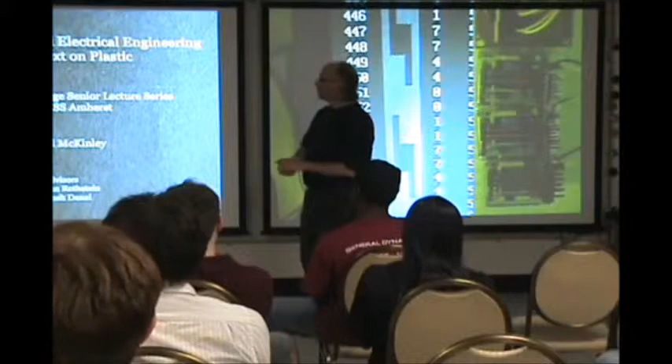Thank you. Welcome. So I'm Michael McKinley. I'm a graduating senior ComColl student in the Mechanical Engineering Department. And I think after last week, the example set forth to bring your own posse was a good choice. So I tried to do that myself, but unfortunately I don't think most of them got past the EE bouncers at the door.

So anyway, today I'll be talking about how we use some interesting properties of polymers to create text on extruded plastic. So as is shown by the title here, let's see. Oh, come on. Got some issues with the mouse going on here.

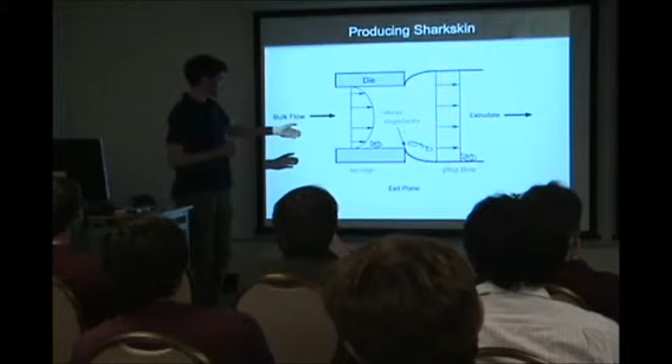All right. So the basis of my project is the production of shark skin. Shark skin is a micro ridge-like structure produced on an extruded surface. And this comes about as a result of an instability that occurs at the exit plane of a die. So you can see here in this diagram, we've got a bulk flow of plastic in this region. It's being extruded through a die face, and due to a temperature gradient, the die exit plane being a lower temperature than the bulk flow, we get a stress singularity.

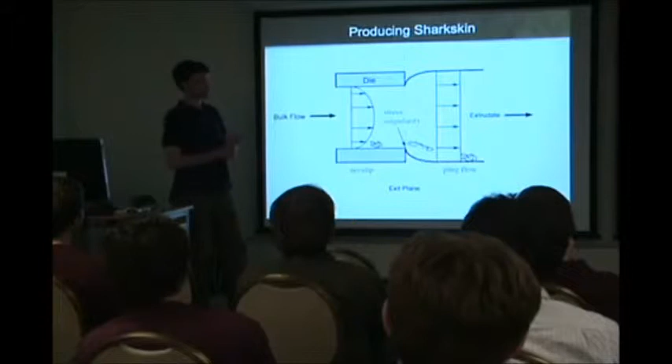And so this happens as a result of a no-slip boundary and the bulk extrudate rapidly accelerating to the plug flow of our polymer. So as a result, if this temperature gradient is too high, we get some pretty severe ridge-like structures, as shown in this image here. And these can be up to about 100 micrometers in scale. In industry, this is a big problem. You don't want your extruded plastic to have a surface texture like this. But we're actually using this to our advantage to produce some interesting textures.

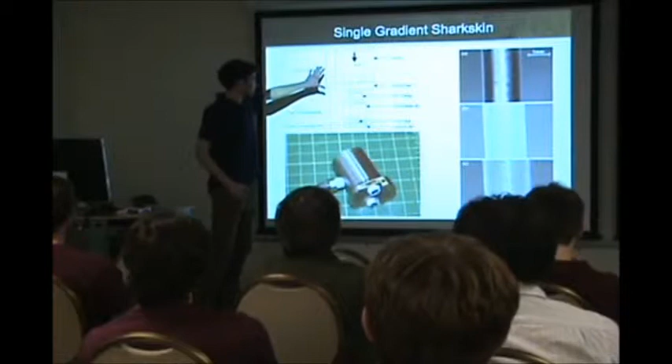So a little bit of background. This project came about 5 years ago, I believe, by a student named Eric Miller, who was getting his master's degree over in mechanical engineering. He was working on a single gradient shark skin project. And so basically what we have here is a schematic of his die. So we're able to produce a temperature gradient between the main heating zone of our extruder and that output plane of our die. And in doing so, we can create a single extrudate difference in shark skin in one dimension.

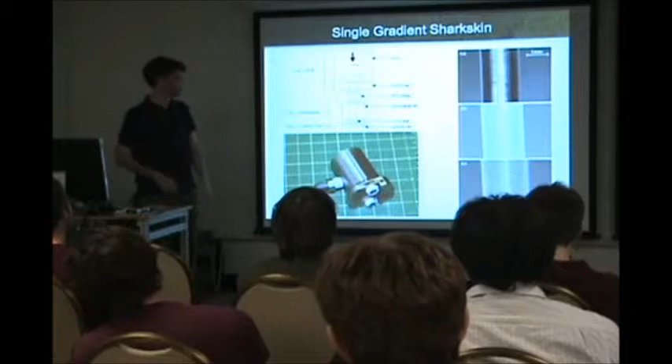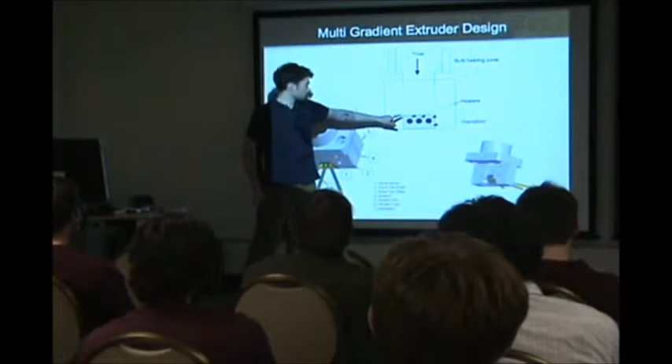So we got some images here of my design. It interfaces with the same extruder barrel as before, so I don't have to deal with that problem. But we're looking at a die with three heater pins, and each heater pin is a temperature-controlled loop. And we'll talk more about that later. But you can see here these are brass heater pins separated by an insulator layer, in a main heater block, which we can maintain at a temperature.

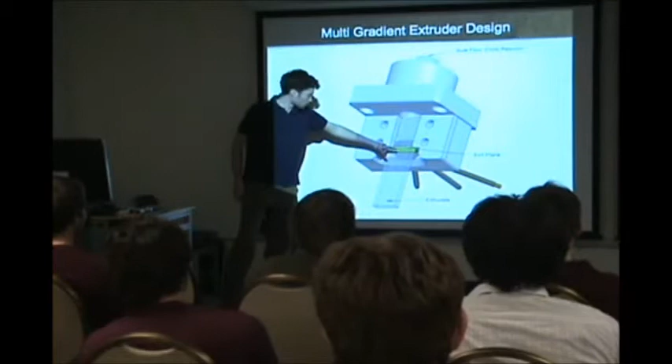So if you look at this drawing here, we can see as this extrudate is coming out, the last surface in contact is this temperature-controlled pin. And so right in these regions, we can control that surface texture and hopefully create some interesting designs, well in this case letters is our proof of concept.

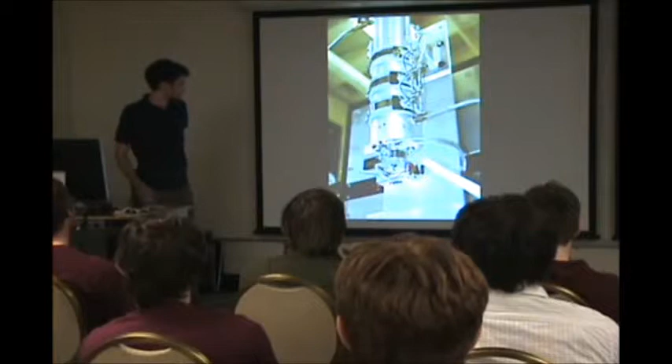It's run-of-the-mill plastic. And then here's another image of our extruder. So you can see if we get that cutaway, our extruding surface is no longer in contact with our die as we're exiting our die head.

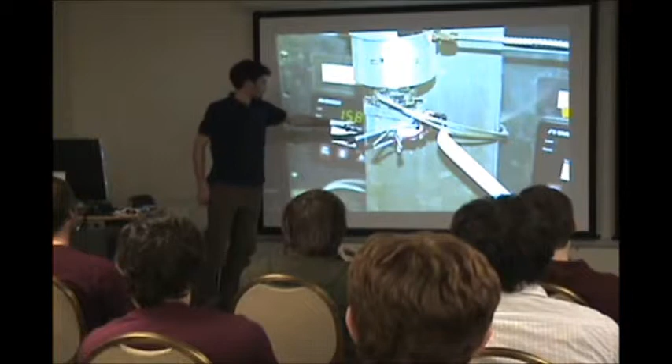And a final image here, we can see our heater pins and all the controls, the feedback part necessary to control our temperature. So we've got 30 gauge nichrome wire wrapped around our heater pins, and buried inside that head, we have some really small temperature sensors. In this case, these are RTDs. I'm actually using LM35s, which are a temperature IC. So they're approximately the same scale.

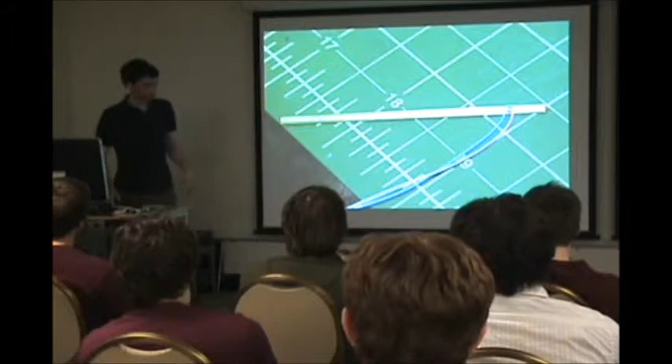So I guess the LM35s are actually really nice because they interface with the Arduino without an issue at all. And that'll be part of my project later here. So you can see those pins are assembled and then epoxied in place. And our epoxy is our insulation barrier between each heater pin, each heater element.

And one of the problems with the design is that you've got to actually machine these things in a specific order. So if you have a problem down the line, you've got to start over due to the limitations of our machining. So this design was pretty much pushing the limits of what we could do with the tools and techniques that we have available.

So, obviously we're dealing with high pressures here, so safety's got to be our top concern, or at least top 3. Yeah, so I don't really think any of that would do me any good if it did let loose, but it felt better, and so we did. And the Non-Newtonian Fluid Dynamics Lab actually looks at Kevlar as one of their projects. So they happen to have a Kevlar vest and helmet sitting around. It's like, well, I might as well put it to use. If something happened and I wasn't wearing that, that'd be a problem.

So anyway, it works. And that's the cool part. You can see here we get a pretty large difference in texture between our large surface ridges around the 100 micrometer scale here and our smooth surface here. And this is a coloration behind, so you can actually see the difference a little better. And that's just kind of a gross start point with my design to see how well it was functioning.

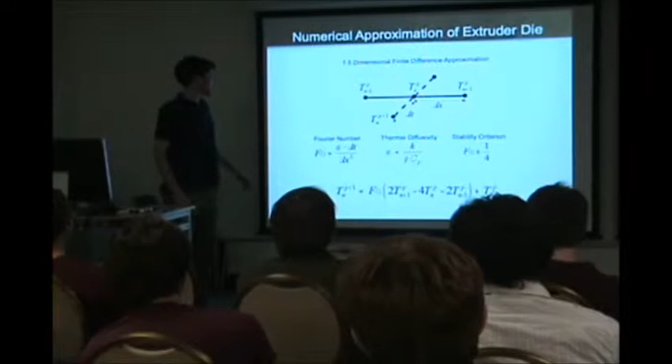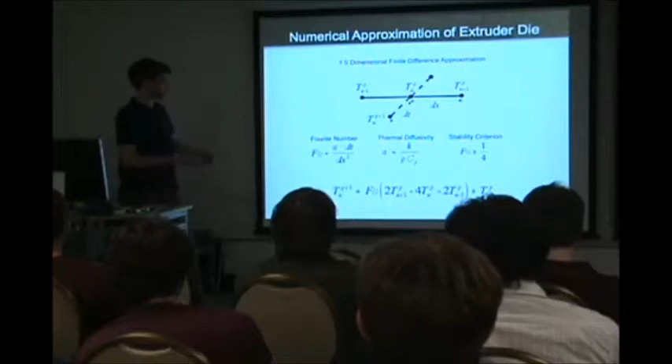So the important thing to note here is we've got our Fourier number, which is really the important part, and that's comprised of our thermal diffusivity of our insulation material. And obviously we got to keep the stability criterion right, so we reach a convergence at the end. And so that can actually get some decent results here. So this is just to kind of show you graphically what we're looking at.

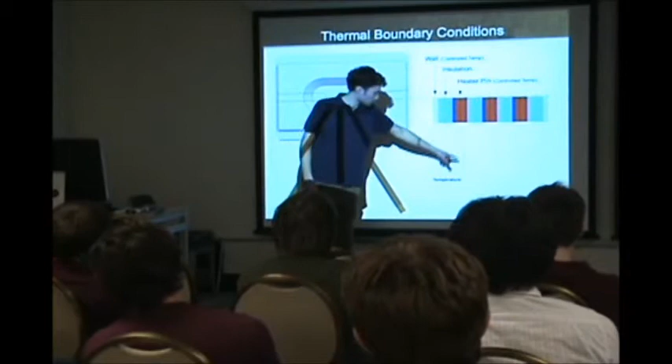We're modeling this interface right here with the heater pins as a one-dimensional heat transfer between a temperature-controlled pin, a temperature-controlled wall, and this insulated boundary layer. And so here's what our temperature would look like. So we've got actual data that I can take from my temperature sensors. That's from the heater pin. We've got a known constant temperature at the wall, and then a second order response from the insulation material.

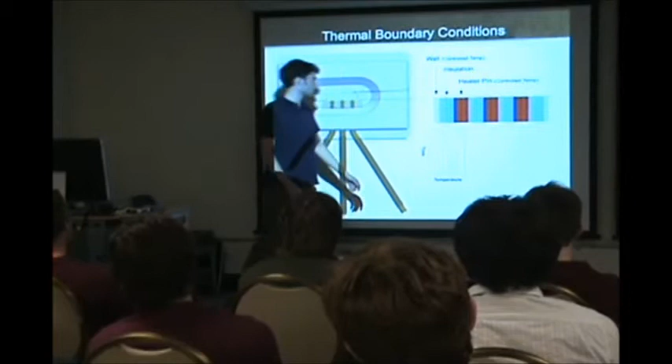Well, it varies from first to second as you go through it. But anyway, let's see here. Get a better picture of what's happening. So to create an M, we start with Albrecht Dürer's nice Roman uppercase M, and then we got my representation, which is 3 pixels of spaciness. And so we're looking at our M, and then we got some signals here that we're translating into heater changes in temperature, and my thermal approximation of what's happening in the surfaces around it.

So the important thing to note here is that this is open loop control, and we're able to do it pretty well because there aren't any consecutive points in this M. So if you look at it in this plane here, we never reach steady state. We're always looking at the transients, and so we can actually push the limits of the system quite a bit and not run into problems down the line. So yeah, here's another look at it.

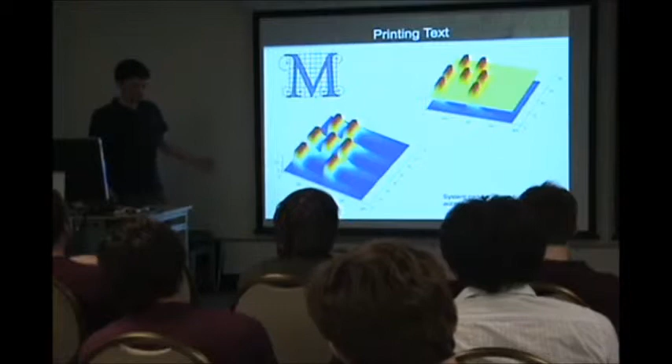So the idea is if we exceed a threshold value, we're no longer producing shark skin. So we'll give it an arbitrary value of 0.5 here. Anything above that, we're getting a nice clear letter. Anything below it, we're getting shark skin, and that's what we want. And so there isn't really any bleed between letters in our simulated piece. So yeah, here's a look at our open loop control.

We've got a program I've written in C that's interfacing with the relay board, and we've got our 24-watt heater coils at each pin, as shown before. So on the screen on the right side here, I can actually demonstrate what's going on. Let's try to get this going here. So I got DOS running. We're high class going over here.

Okay, so you see it's printed out UMass in SpaceFont, and it's been printed out a few times here. And so we got our relays clicking away over there, nice and happy, making space music, and I got some LEDs, and everything would link up to our extruder, and we get open loop M's, which look like that, and you can see it look kind of like the M in the simulation over there. So if you can't see it, there's the M. You can see Albrecht Dürer's M right there, nice and clean Roman serifs and everything.

And yeah, so that works pretty well for the letters that never have to reach steady state. But if we're talking about something like an H, then we got some problems going open loop. So this section in here, if we're pushing it real hard to get those transients, we're going to exceed the limitations of our insulation material, and we're going to get a bleed over. So you can see the bleed over in the H over there on the right-hand side.

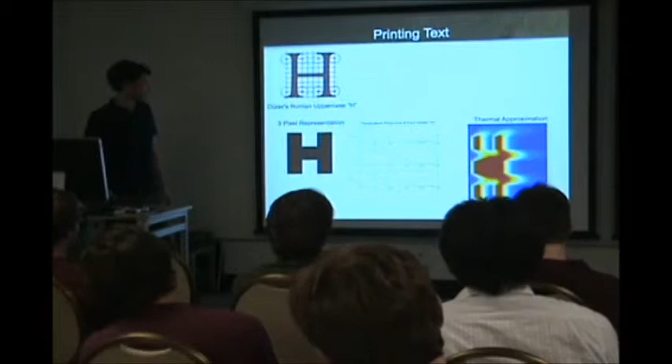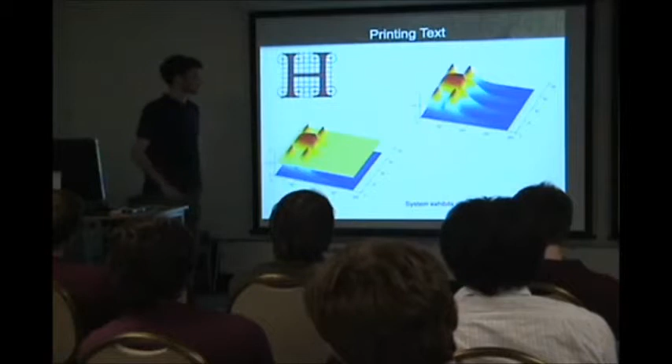And that becomes more of a problem down the line once we get a whole series of letters. So if we had a bunch of H's in a row, then the consecutive letters would be more and more out of control because we don't have any feedback. So we got this nice Arduino system here. So here's a closed loop control algorithm. Basically, it's the same block diagram as before with our open loop boards, because I made everything modular.

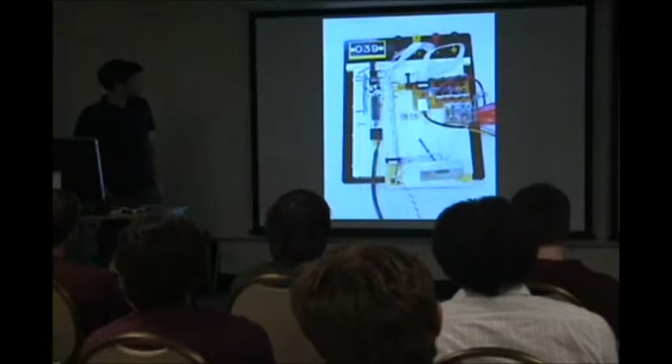But we're looking at 3-channel PI control through the Arduino, which is kind of fun because the Arduino works really well for this. I'm only running at 40 hertz with the Arduino because we're kicking back serial data every 0.025 seconds, so I get an idea of what's really going on. And I was going to bring it in to show you, but it's kind of stuck to my extruder at the moment. So yeah, here's a picture of my board, and there's a cutaway of the heater pins that we're working with.

So this is kind of my thermal test apparatus. So I can do some controller tuning without being actually next to the extruder and taking up lab space. So I've been driving Jim nuts with the pulse width modulation on the relays all day long.

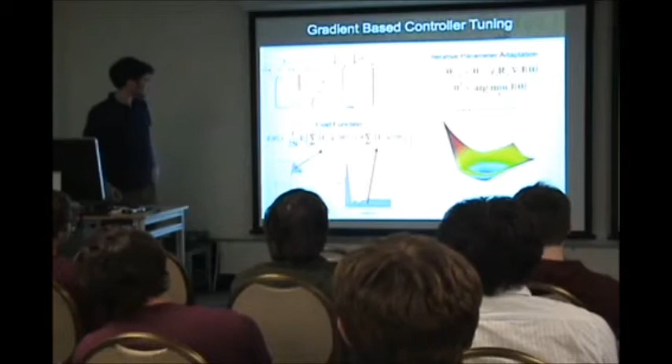So in one slide, I'm going to tell you how we do iterative feedback tuning, which is gradient-based controller tuning. And kind of the basis of it is we've got our control loop. I don't know if any of you or all of you have taken controls, but here's our control loop, right? And our G is our plant, which is the thermal response of our heater profile. And our CR and CY are, in this case, PI controllers. Now our CR has moved beyond our summation block because we're trying to get rid of a derivative kick.

And then we're applying a tuning algorithm. In this case, the point of the tuning algorithm is to find the lowest cost of a cost function. You can see a green line here, which represents the response of, I believe this is a fourth order system. The green line is what we want, the blue line is the actual response, and the cost would be the integral of that area between the two. And you could play games with both the system response and the control effort to get a best cost overall, depending on what you want to do.

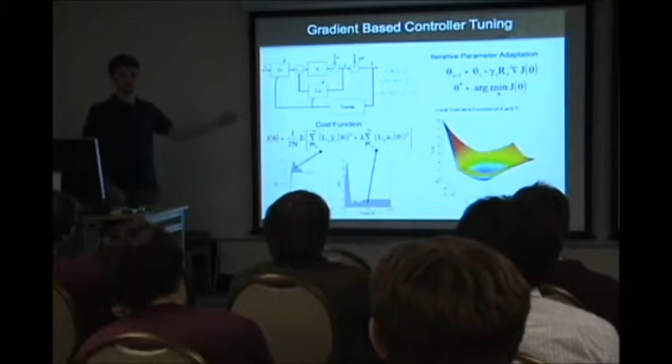So we can apply that. I mean, we can also apply Ziegler-Nichols and basic tuning laws, but this is much more fun, really. I mean, come on, we got Simulink running. I already did system identification, so we do fun stuff.

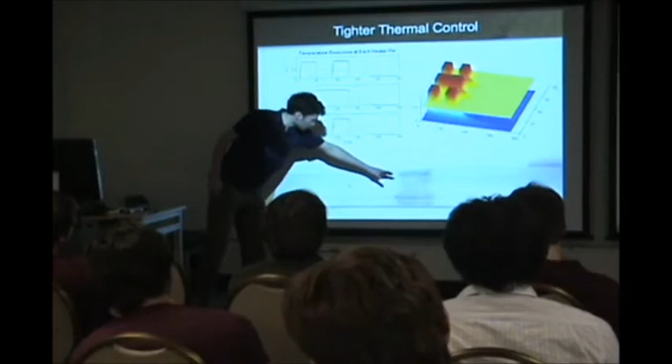But here's our H with thermal control, and there isn't an H there, but you can see we're not getting any bleed over between the pins here. So everything is segregated to one side of that extrudate. And the point of this graph here is to show you that we're not exceeding tolerance values that we set on the plastic. So we don't want to burn it, for example. We can control exactly what we want and get a really, really fast response time on those H heater pins.

So all in all, it's a pretty good system. It works reasonably well to print text. And the point of the project was proven in that we can accurately control the surface features of this extrudate. Now you ask, what's the point of controlling the surface features of plastic extrudate? Well, in our lab, Professor Rothstein's primary research at the moment deals with drag reduction in microstructures on surfaces.

And currently, the method they use to do that is a photolithography-based method, and it takes weeks, and it's a pain in the neck. So ideally, you could use something like this and tune it just right using my controlled feedback method here, and produce surface features of exactly the right amplitude and, not wavelength, but period that you want. So it's a pretty neat little step forward in that regard.

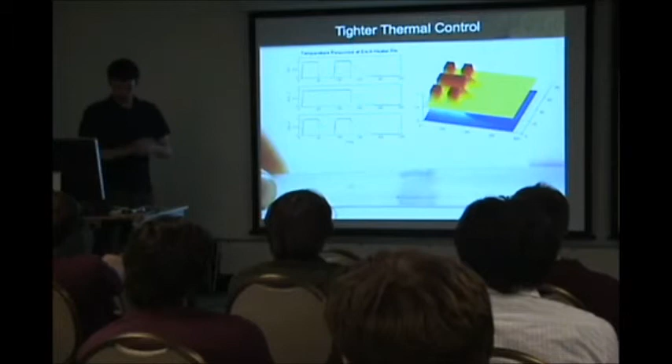Some final notes to conclude here. I got some interesting little things I learned along the way. Winding those coils is a real pain because they're all up to 2 inches long and 30 gauge wire, and they're all wrapped together. So I took a hint from your wire wrap tool, which is in the soldering room there, which some of you may or may not have even used, but made my own for winding heater coils. So if you ever need to wind heater coils, I'm all set, good to go here.

Step 2, when you're doing your thermal control, it's a lot easier to do with something with a smaller thermal mass when you're tuning stuff for the first time. So I made a breakout board for the LM35s. As it turns out, 30 seconds after I finished my breakout boards, I decided to open a random drawer in your part room, and it turns out you've got breakout boards for SOT small outline transistors. And well, I learned a lot in the process.